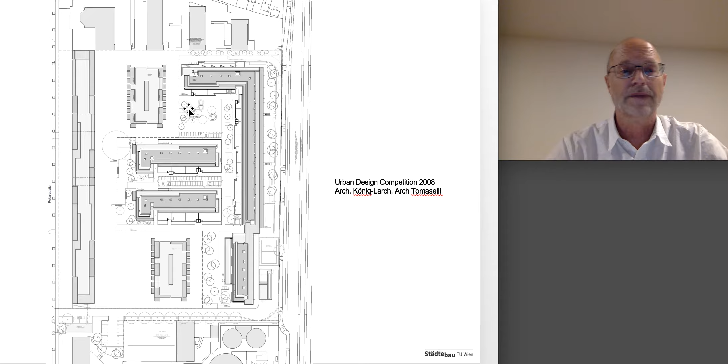Usually these competitions are only partly given to the architects that win the urban design competition. The others go through the evaluation process necessary for subsidized housing, as I explained before. So in this project, I will continue with the contribution of König-Larch Architects.

You see a structure that is very additive, with this long corridor and some storage boxes facing the train tracks, creating courtyards, private green space in front of the ground floor apartments, but also semi-public green playgrounds for children, a kindergarten for 3 groups, and an underground garage.

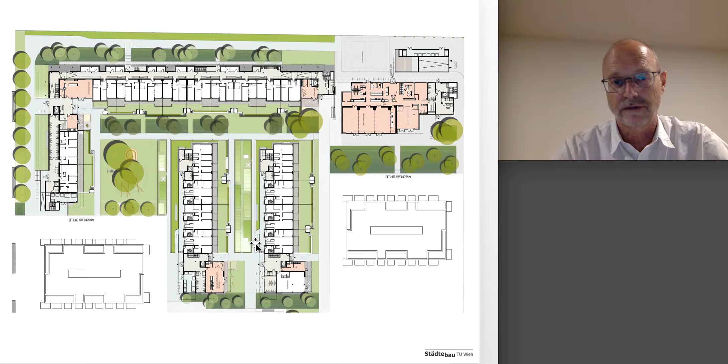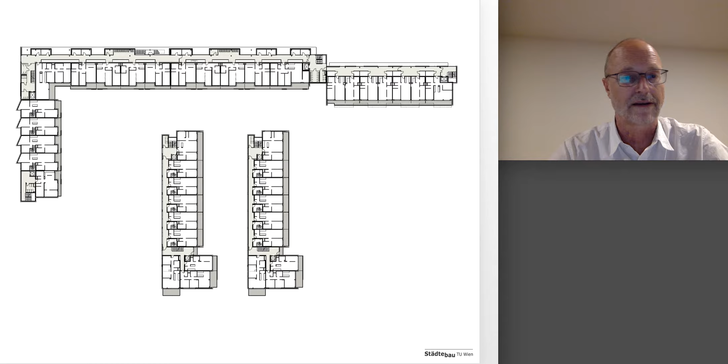Just one more explanation about the apartments. They are quite regulated, so you cannot do whatever you want. A certain size, certain square meters, and a certain amount of sleeping rooms have to be offered, for example.

What you see here is that every apartment has one bathroom. When you have 2 sleeping rooms, you have a separate toilet, but you will never have a suite like, for example, a master bedroom with a bathroom and two other bedrooms sharing a bathroom. You will only have one bathroom per apartment.

This is absolutely not understandable, for example, for Brazilians, who usually have their own shower for each room, at least.

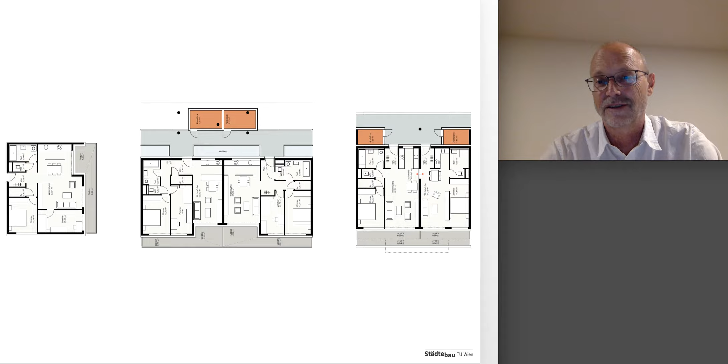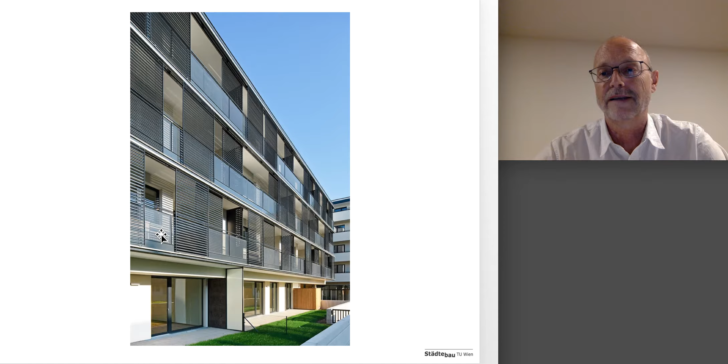The facade in the courtyard always has brise-soleil, sun protection, movable, transparent balcony, with different depths of the balcony to offer places where you can also put a table or a lounge chair.

Also on the ground floor, you usually have these kinds of meeting rooms, ballrooms, festivity rooms for the community where they can join, have parties together, or even rent it out to one of the residents to have a meeting with a bigger family or whatever they cannot do in their apartment.

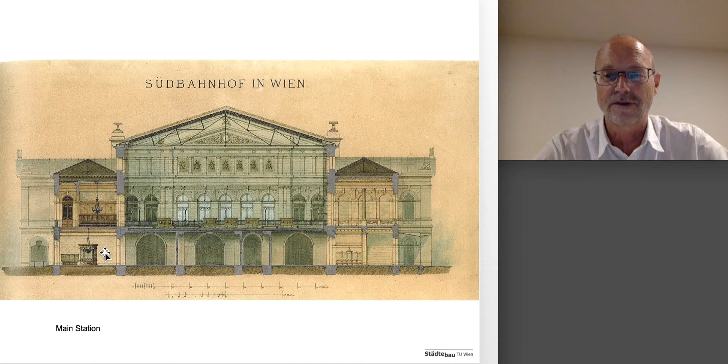But what mostly has been done in Vienna was the transformation of former train stations, as I told before. One of the biggest areas is the Südbahnhof, the Southern Railway Station, which wasn't exactly the southern one, it was the southern and eastern together. This was replaced by the new main train station.

Before, the train stopped in a building that joined these two tracks, but you couldn't go through. Now, according to the needs of the European railway system, this is a pass-through train station where the trains stop here, the entrance intersects with the subway access, with a business district on the northern side and a huge housing development in the south.

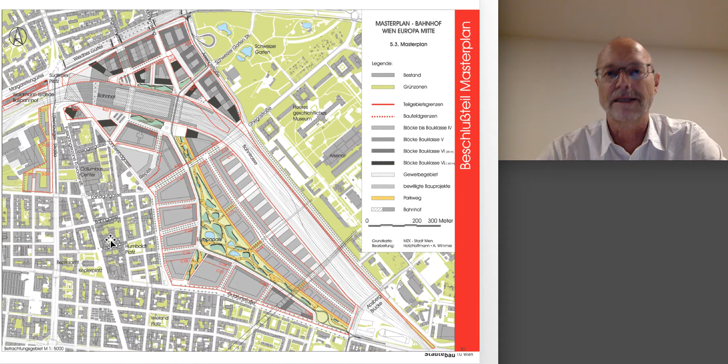This was more or less the master plan. It turned out a little bit different at the end, but in general the development is following the plan quite closely. There is a central park, a public park.

There is a tramway, a kind of light railway system accessing this part. There is a school with kindergarten, a kind of campus situation. And these buildings start looking like towers in the north, some even by fancy architects like Renzo Piano, overlooking the city skyline. These are the train tracks now connecting east and west at the central station of Vienna.

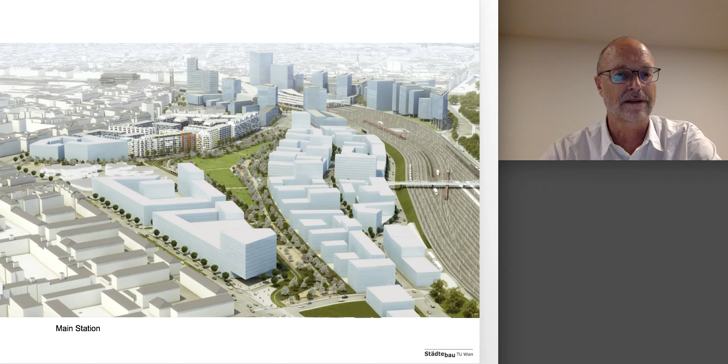This is an aerial view. You see the roof of the train station, the towers of some office buildings. This is the headquarters of the Austrian Railway Company.

And this becomes the park, which brings me back to the topic: it needs time, the trees need time to grow. Even, or especially, in Europe they need a lot of time, much slower than it works in the Dominican Republic or in tropical countries. So this is the actual situation.

I think this part has been transformed with another proposal. I'm not entirely sure about that, but Roland can explain it in detail as he was in charge of this development anyway.

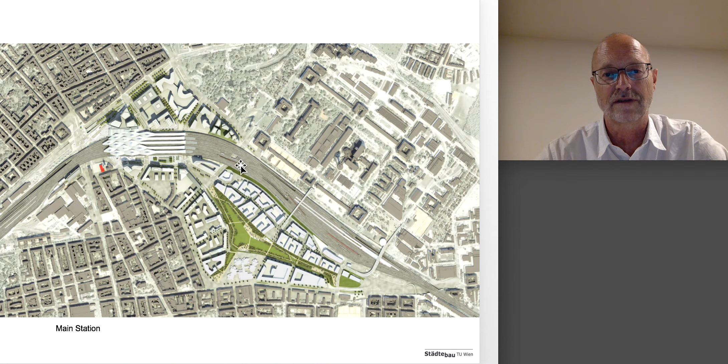So the actual situation is like that. You have a former military base here from the Austrian Empire, now the Museum of Military History, a park, a museum of modern art, a bank, office buildings, some hotels, a train station, offices, and a lot of housing going down here, currently under construction on the eastern side of the new development.

What you can see here is the traditional urban fabric of Vienna, the blocks. Not exactly as rectangular as I showed before, but it's the same system: very densely built up areas, small apartments, not very luxurious, and not high quality built residential buildings.